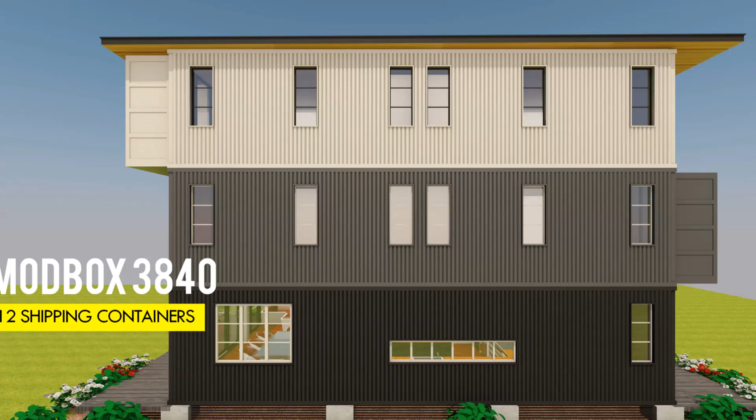In this video, we bring to you Modbox 3840, a luxury container house designed using 12 40-foot shipping containers. Stay tuned to find out more about this amazing container house design.

Without further ado, let's get started. Design concept.

Modbox 3840 is designed from 12 40-foot shipping containers. The containers are placed parallel to each other in pairs of 4 40-foot shipping containers stacked on 3 levels to form a block of 12 40-foot shipping container house design.

The containers are placed in parallel by alternating the open side containing the original container doors used in an open position and welded in place to create nice Juliet balconies as outdoor spaces.

On the ground floor, however, the shipping container end panels on the living room side are all opened up and fitted with full height sliding glass doors for adequate lighting and ventilation to the living space.

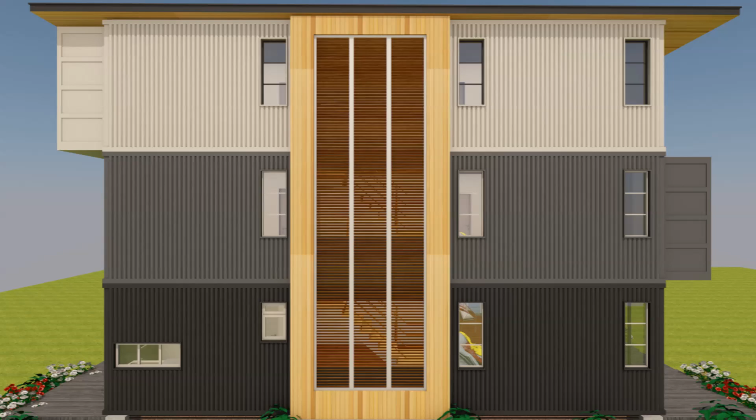Foundation design. The shipping containers sit on an elevated concrete pier foundation. This is to enable us to elevate the shipping containers away from moisture and also to allow us to conduct our plumbing on the underside with ease.

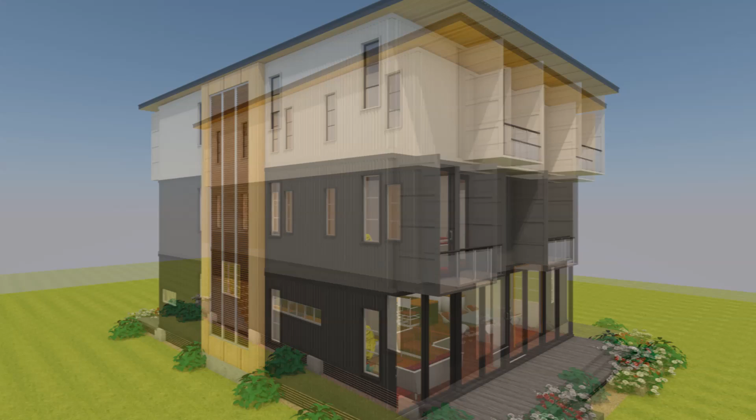Design brief. In these 12 shipping containers, we've managed to accommodate as much function as we could and provide adequate spaces for each function.

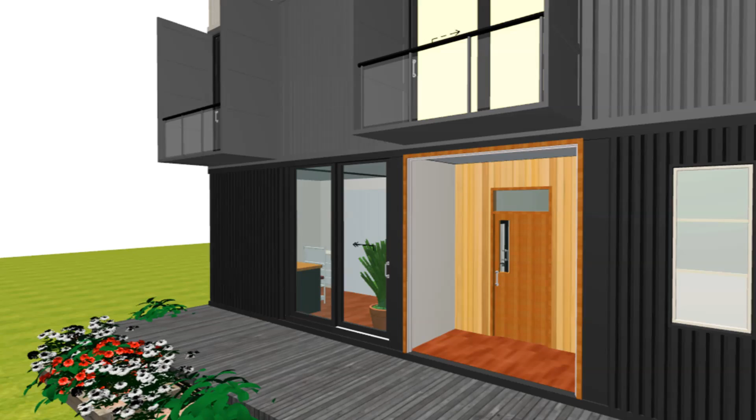On the ground floor level, we have an entrance porch accessed from a front deck into a slightly recessed entrance porch fitted with a nice solid door as the main entrance. You get into an entrance lobby from which you can access the most public and semi-public spaces on that floor.

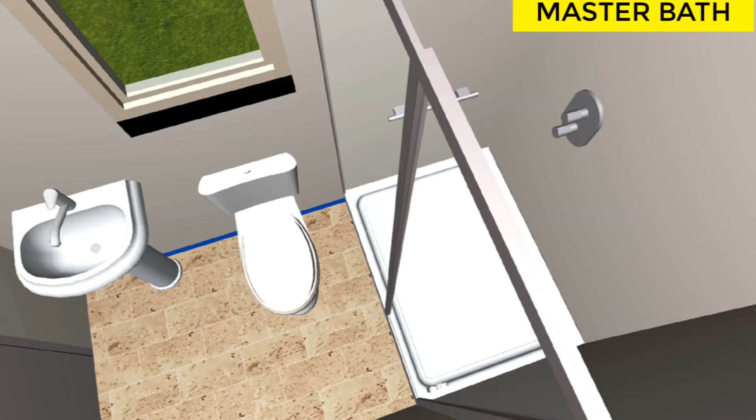On your right hand side, we have a cloakroom or a guest bathroom on that particular side and a small laundry space. On the opposite side of the entrance lobby, we have a guest bedroom with a walk-in closet.

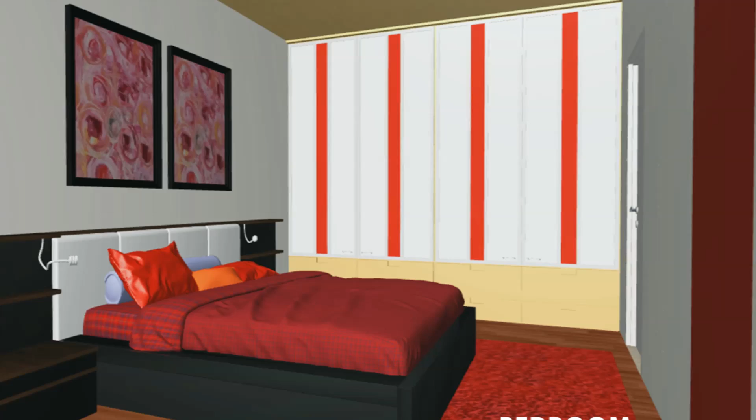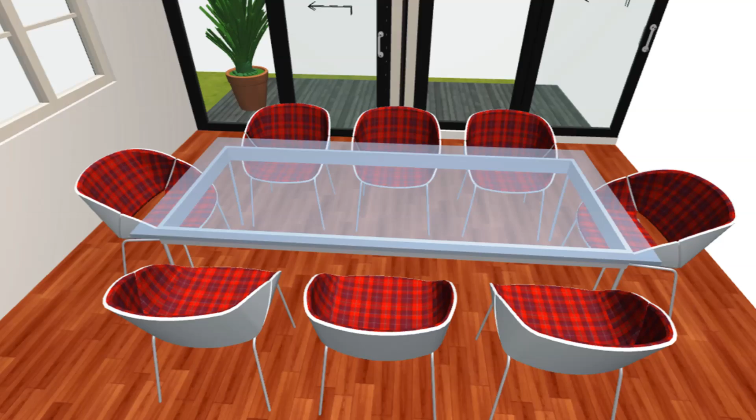Further ahead, we have an open plan living space containing a kitchen with a breakfast island for 3. We have a nice dining space which can seat up to 8 and a nicely furnished cozy lounge space.

From the staircase lobby, you can take the staircase to the first floor level where you land into a common lobby space from which you can access 3 bedrooms with their own walk-in closets.

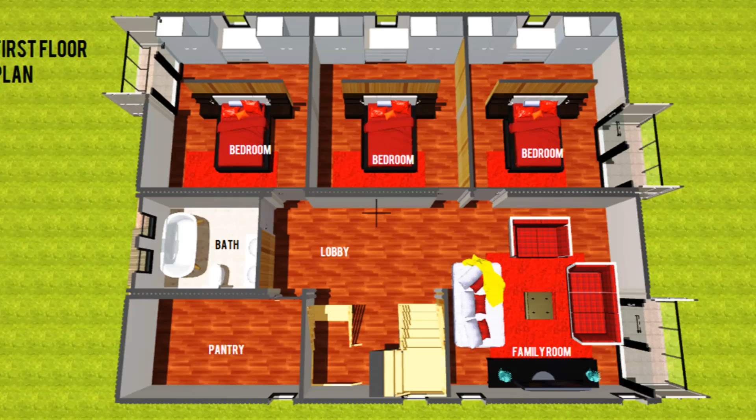We have a common bathroom with a bathtub, a toilet and a vanity sink. We have a small space that can be used as a store or a pantry to the house.

On this particular level, we also have a private family room where you can relax or watch TV away from the public living space on the ground floor level.

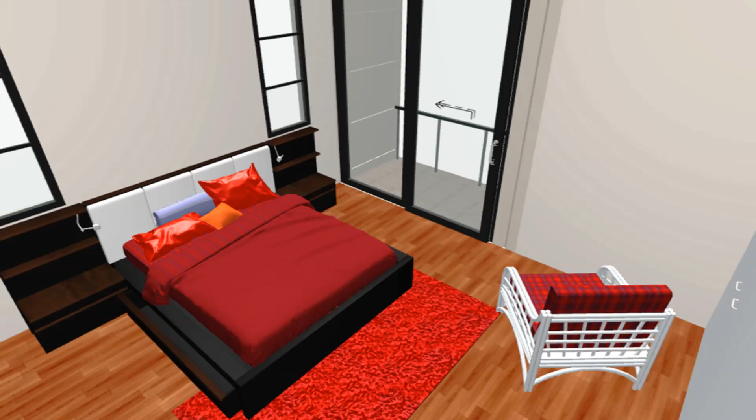Last but not least, on the topmost floor, we have a master bedroom with a bathroom. We also have an extra bedroom that can also be used as a children's playroom or a romper's room.

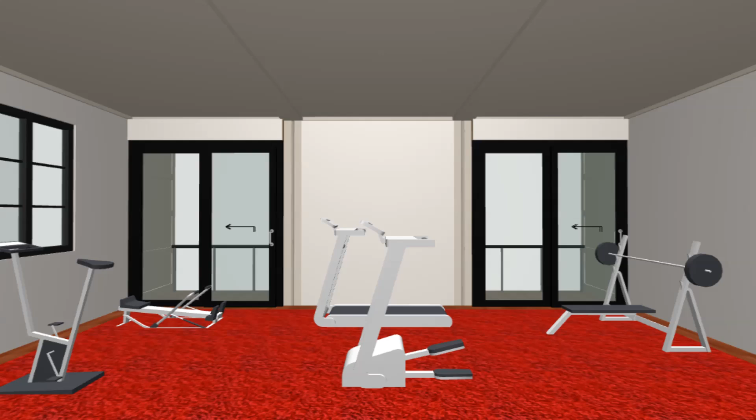We have a big space for an exercise room, or what you would call a home gym. We also have a home office or a reading room for the house, and also we have additional storage for any extra items for this amazing house.

Something to note is that each and every room fronting the house or at the rear has access to the alternating balconies on each and every level of this amazing house.

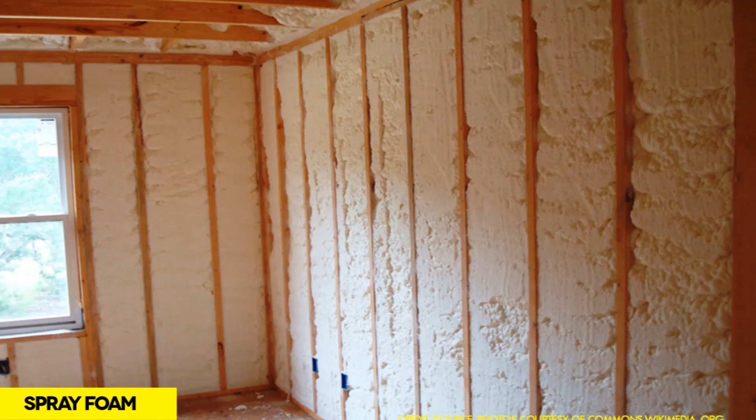As usual, you are encouraged to observe proper insulation and ventilation. If you live in cold climate areas, you can use closed cell spray foam insulation for your house. And if you live in the tropics, try to keep heat away from your house as much as possible.

The inside of this shipping container house is designed with light colored paints on the ceiling and walls to help the space appear bigger and brighter, helping kill that claustrophobic feel of living in a container box. You can also try different furnishing ideas like Murphy beds, which can transform bedrooms into a bed space at night and a children's playroom or romper's room during the day.

When it comes to outdoor seating or outdoor spaces, we've provided Juliet balconies on each level on the first and second floor. On the ground floor, we have generous outdoor seating spaces, with a front deck and an additional deck at the rear of the building, ideal for evening dinners and barbecue parties.

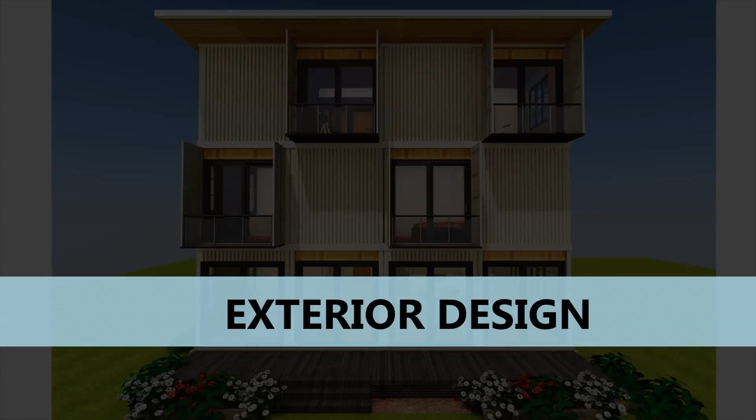When it comes to exterior design, we've tried to maintain the original look and state of our shipping containers as much as possible. If you look closely, you can see the grooves of the original corrugations are highly visible from outside.

We've painted the containers different colors, with darker colors on the ground floor level, lightening up as you go upwards. You can try out different color combinations depending on what works for you.

The windows also use adequate sizes, so there will be no need for specialized modifications to the structure, save for the open plan living spaces on the ground floor and first floor living room, plus the additional space on the topmost floor for the gym. All internal walls that were cut out need to be replaced with additional steel reinforcement to maintain the structural integrity of your shipping containers.

We love the open plan living space of this amazing shipping container house design, and we've just demonstrated the ability to use any given number of shipping containers to attain a design arrangement of your choice.